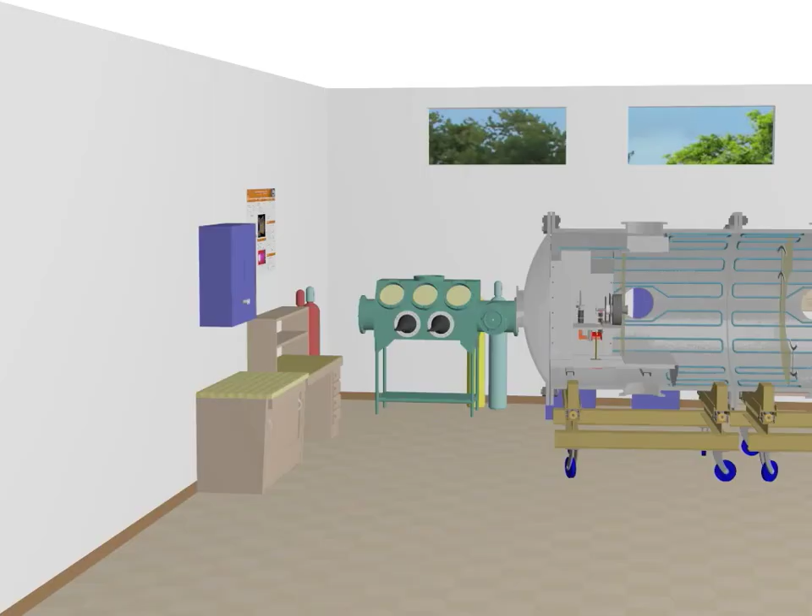I'm Will, and this is the third of 4 videos I've made summarizing the projects I've worked on here at Princeton. This video focuses on the dynamic resistance probe, or DRP, which I've used to measure propellant condensation, and which has applications to plume divergence measurements and measurements of plasma reattachment to spacecraft.

This might be one of the simplest diagnostics ever created. I put a piece of steel tape on a stick. That's really about it. The idea for this diagnostic came out of the joy that is working with lithium propellant, which coats everything in the tank in a conductive, hazardous mess.

I was wondering if I could somehow turn that weakness into an advantage. One of the characteristics of lithium is that it is about 10 times as conductive as steel, which means that as lithium coats a piece of steel tape, the resistance of that tape will change as a function of the lithium thickness. By measuring that resistance as a function of time, and with a little bit of math, you can figure out how quickly the lithium is being deposited.

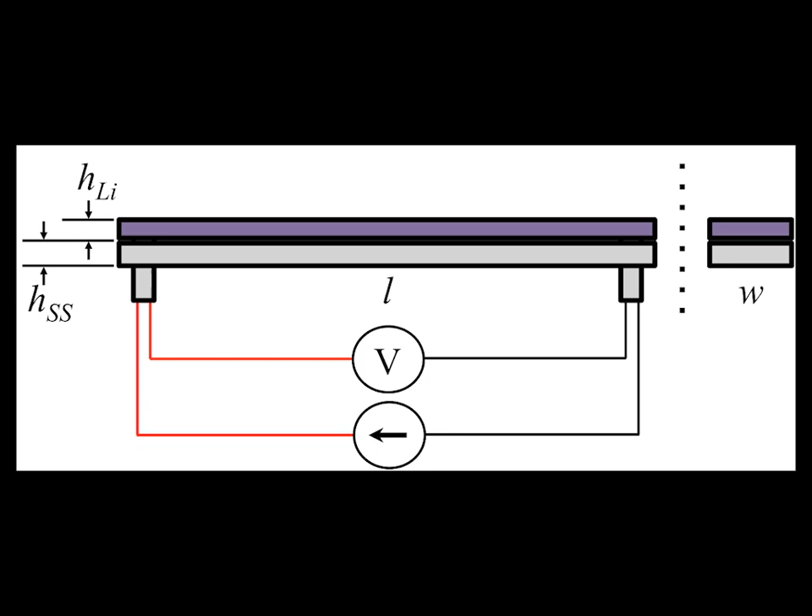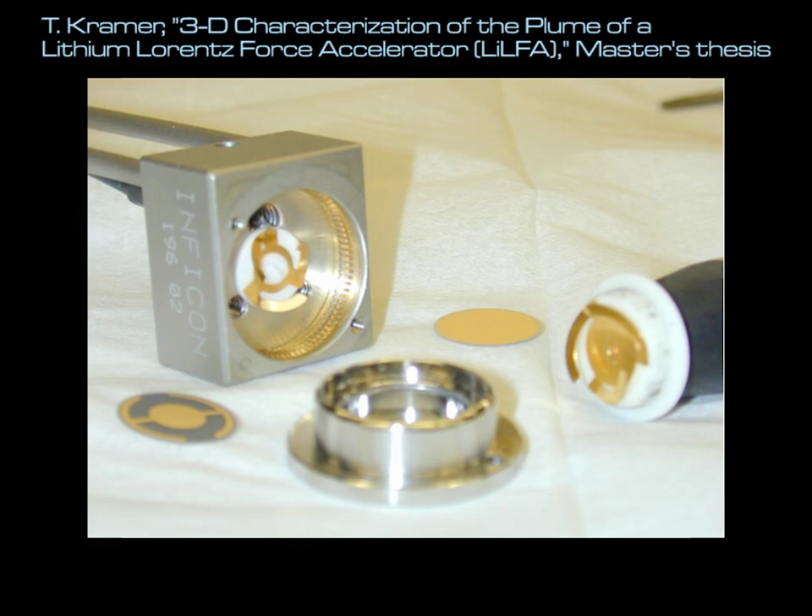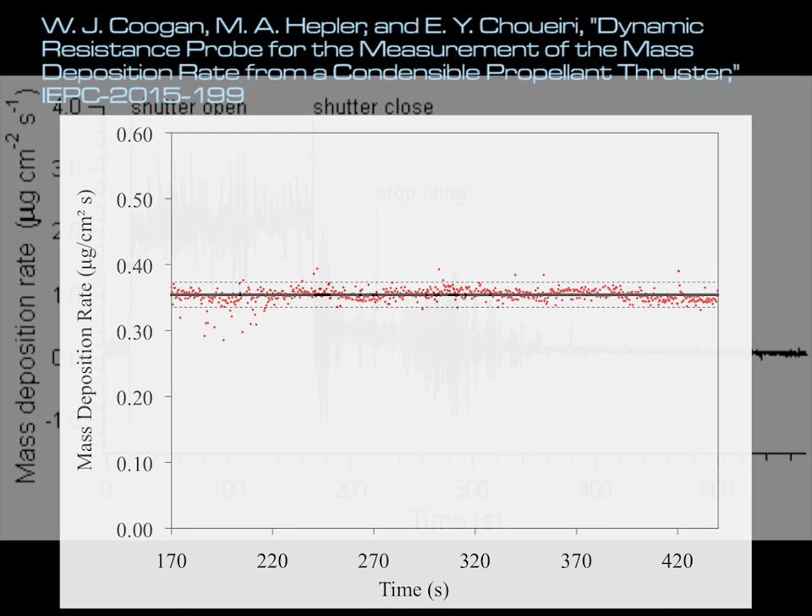There's a standard way to make this measurement using something called a quartz crystal microbalance, or QCM, which involves a vibrating piece of crystal, but this was used previously with the LILFA, and the error was 20% of the measurement. I tried my tape on a stick at the same location, and the error was only 6%, or less than a third of that found using QCM. And it was super cheap and easy to make.

I also made more sophisticated versions, which are curved such that they represent a fixed radius in the plume of the thruster. By positioning the probes at a number of radii, you can get an idea of the mass distribution in the plume, or the plume divergence.

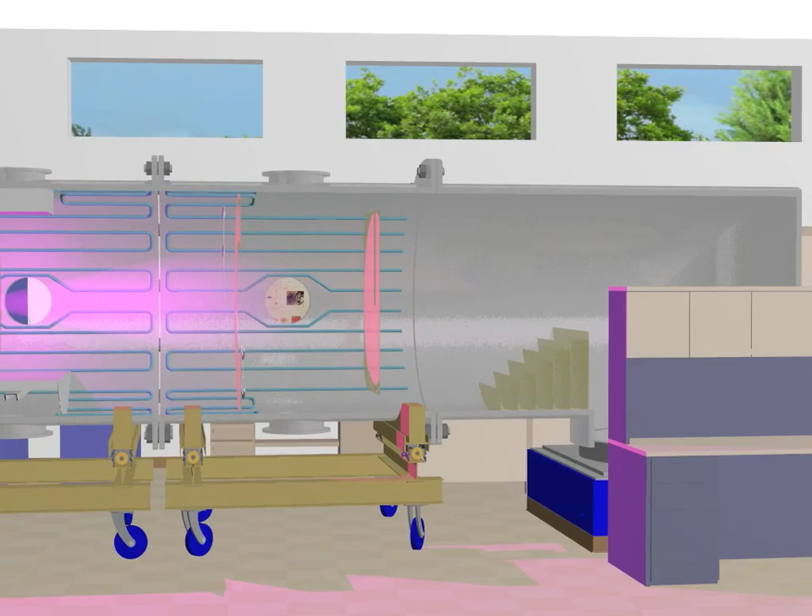This probe most easily measures the total accumulated propellant on a surface, and for that reason is well suited to measurements upstream of the thruster, where plasma may follow magnetic field lines back to the spacecraft. You can imagine that coating a spacecraft with lithium might be a problem. However, our facilities are not large enough to allow for such a measurement, and so we have not investigated that topic.

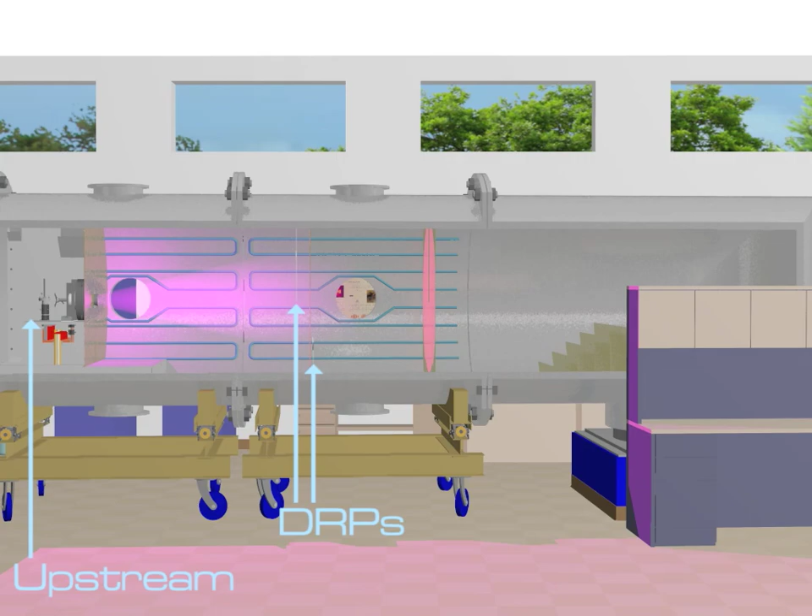This concludes the third video. The fourth and final video will focus on 2 different projects: the design and implementation of a liquid metal feed system with no moving parts, known as a J-X-B pump, and the design, construction, and testing of the argon Lorentz force accelerator, or ALFA.